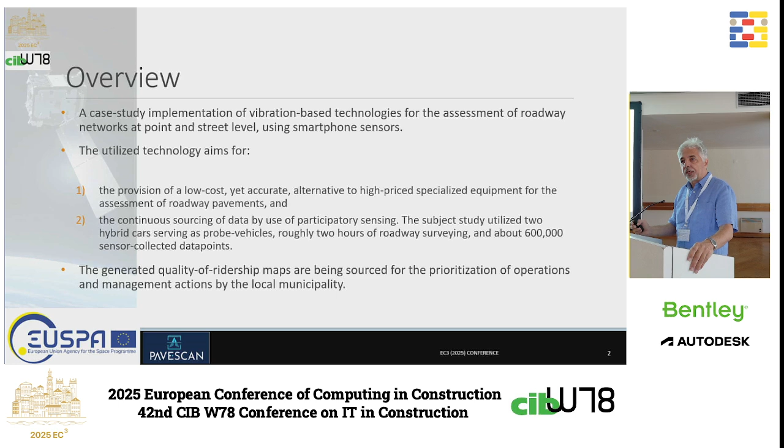Okay, from past works, we primarily have three ways of assessing pavements. One of them is based on vibrations, vibration sensing. The other one has to do with vision-based methods, cameras and videos, okay? And then the last one is laser point technologies. Each one of them has some advantages and disadvantages. Some of them relate to the accuracy, some to the cost, some to the speed of the data collection, et cetera, okay?

But if you can collectively use the methods and pick the advantages of each one of them and combine them into a single unified integrated method, hopefully that would be a better approach. And this is basically what we're trying to do. We're trying to merge these three technologies into a single robust integrated platform system that can give us better and easier and cheaper assessment, okay?

Three key findings of past pilot studies relate to the way the pavement roughness is assessed and the inaccuracies in it, and how you detect distress in the pavements, and by distress I mean anomalies like potholes. Some of the methods, for instance the vibration methods, are good in detecting potholes and speed bumps. Some of them, like the vision-based, are good in detecting cracks, but it's more difficult to use. Some of them, like the LiDAR, can also measure depth of the distress, but even that is not easy because if you're traveling at a speed, the LiDAR cannot quickly adjust to the data collection, okay?

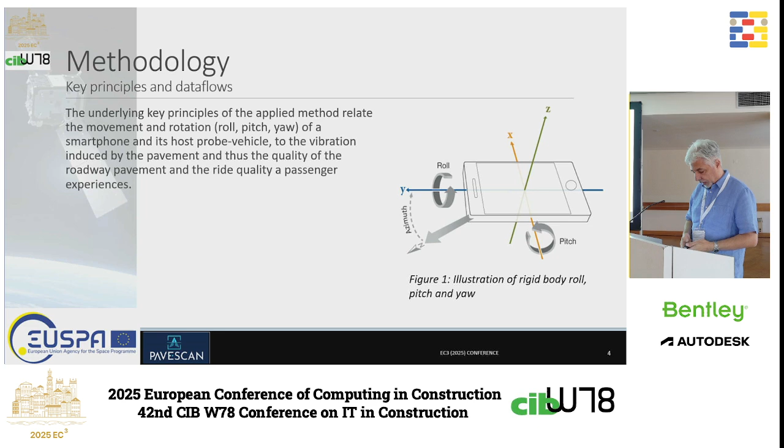With regard to the vibration method that I'm going to talk about, we are using a smartphone-like sensor technology, and we're using the vibration of a smartphone that is on a car to relate the movement of the smartphone to the distresses on the pavement, okay? So we're looking at roll, pitch, and yaw, the vibrations, the rotations of the smartphone or the sensor, and we have a process that allows us to go from points, the vibration of the smartphone, to streets, to directions of the street, and also to the area, the municipality.

So we start from points and we go all the way to the area to assess metrics that relate to the pavement. On the way, we use a lot of machine vision and machine learning techniques, artificial intelligence techniques. We use aggregation, clustering, classification techniques to go from points to roads, okay? And at the end of the day, we feed all the information to this pavement management system that allows us to prioritize the work. Work meaning which roads to fix, which roads to maintain, etc. Okay.

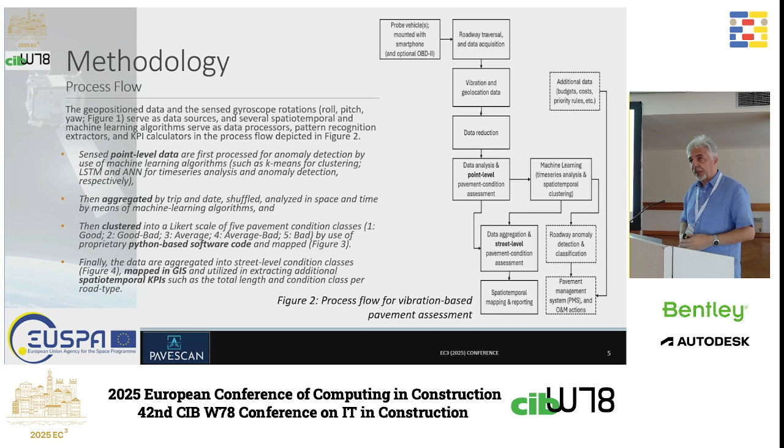The more runs you make, the closer you get to the reality, in the sense that if you have multiple drivers, at the end of the day you normalize the behavior of the car, and you reach a conclusion that combines the knowledge provided to you by all these different drivers. Okay.

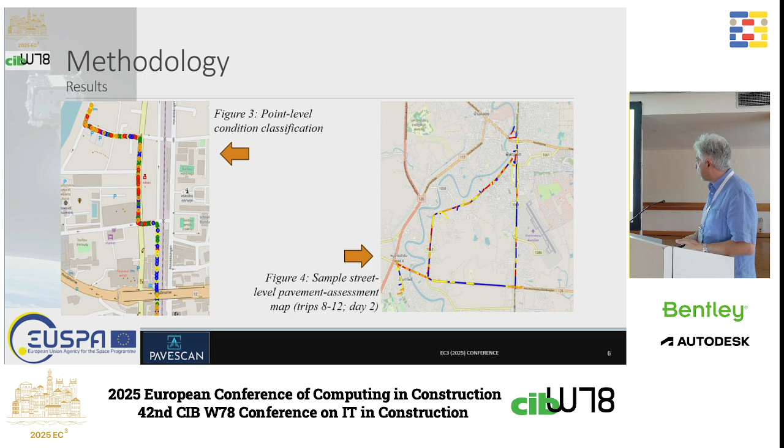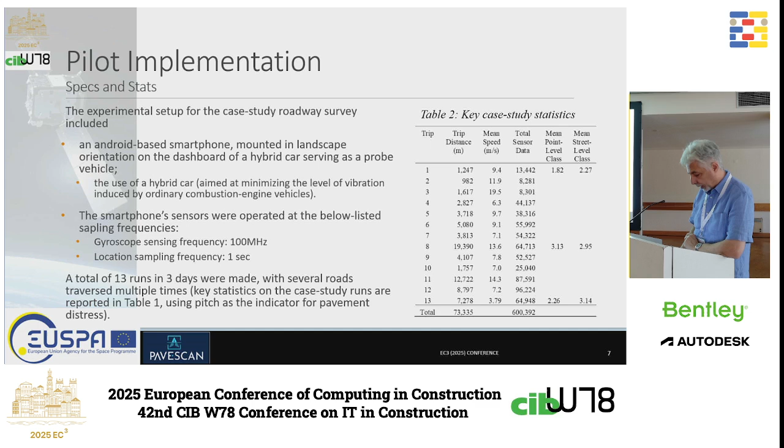We ran this technology in Thailand about 2 months ago. We ran about 13 different runs in a period of 2-3 days. These are the distances. We covered about 73 kilometers of roadway. That took us about a couple of hours. You traverse the network in regular car speed, 50-60 kilometers per hour. So you get a lot of data, hundreds of thousands of data points.

We classify them in 5 scales, 1 being good condition, 5 being the reverse. Class 1 means good, class 5 means bad, and you have some intermediate classes. We go from that point classes to the classification and grouping of roads. We evaluated primary, residential, secondary roads. We classified several segments.

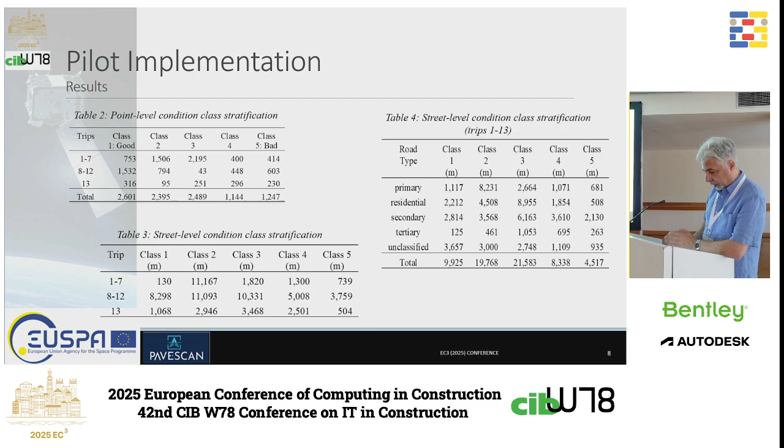And at the end of the day, we evaluated the accuracy of the method with known metrics that the municipality had. It's not an IRI metric because they just got a specialized vehicle to do IRI testing. But we hope to be able, at the end of the day, to go from these classifications to a more internationally recognized classification based on the IRI.

A couple of findings. The vibration-based method that we use gives you good enough results. It may not be accurate, but it's good enough, and it could be the basis for this pavement management system. To increase the accuracy, you can combine cameras. You can use the camera of the smartphone if you can avoid the GDPR issues. Otherwise, you can put a GoPro camera at the back of the car, because you need the fast shutter speed, and collect videos as well.

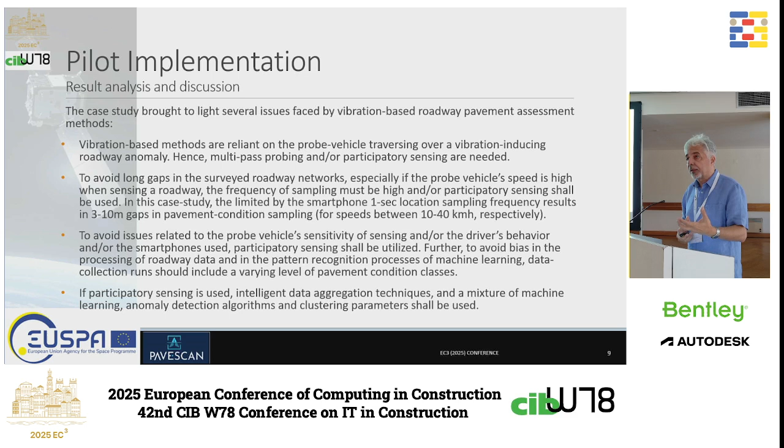That allows you to map also the anomalies in the pavement, not just the condition, not just the movement of the car, but also the specific anomalies, the potholes, for instance. So we are now switching from GPS to EGNSS, which is the topic of this project actually. The EGNSS provides even more accuracy to the level of centimeters.

We're looking at normalizing, stratifying crowdsourced data, to avoid biases from the drivers or the cars. Further to vibration and video, we're now combining low-cost LiDARs. And all this, as I said, in a combined integrated platform that allows us to go from the sensing to a number of sensors in between, databases, maps, and then at the end of the day, the pavement management system.

The sensors we're using are all low-cost sensors. We are now aiming for a 1,000 euro cost per device, and for a more advanced system that includes the LiDAR about 5,000 euro per device. That compares to the 500,000 euro per specialized roadway assessment van. So the end users of this will be bus operators and the municipalities, primarily, and the Ministry of Transport.

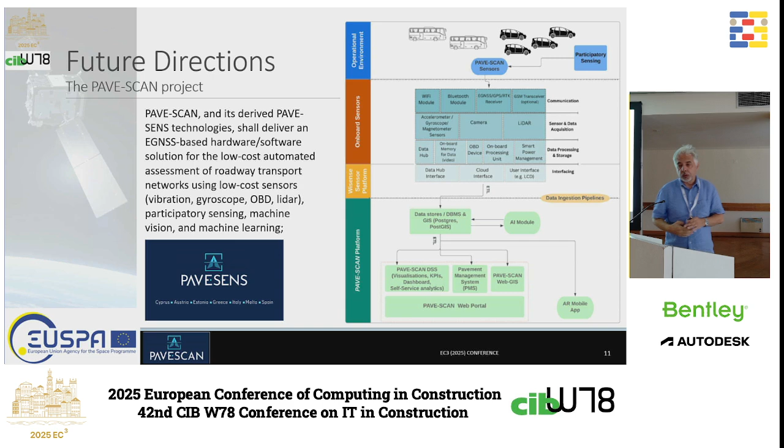The project, as I said, is funded by the European Space Program Agency. It's called PAVE-SCAN. And these are the first deliverables of this project. The sensors, as you see, are a box of about this size. Now we're expanding them with some additional sensors and an onboard machine vision processing unit that processes on the car all the pavement anomalies.

You go from the sensors to the GIS platform that shows the roll, pitch, and yaw metrics, videos of the anomalies, a map showing the condition assessment. Then you have a Python-driven machine vision, machine learning platform that analyzes clusters and aggregates data.

And then to the right, you see an augmented reality application that allows citizens to collect data, not just drivers, and look at the anomalies as they were detected by the machine vision and the vibration sensing technologies in an augmented reality environment. And at the end of the day, all this information is linked to a smart city platform that shows municipalities where the pavement anomalies are. So now you have an integrated system where drivers, municipalities, bus operators, and citizens can see all this information in a unified manner.